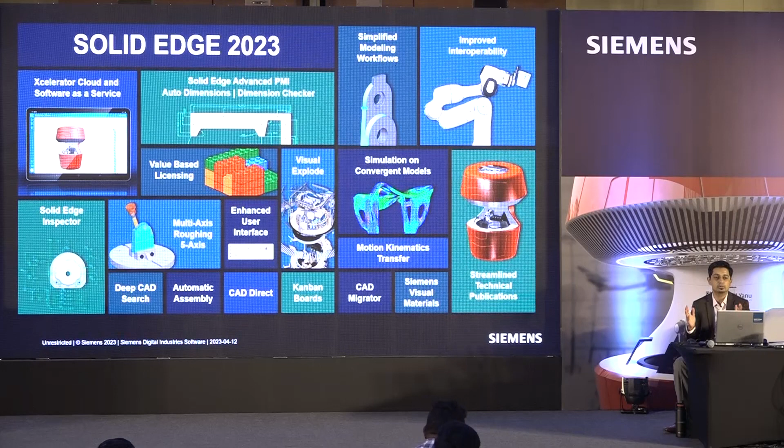This slide actually talks about a condensed form of everything that I'm going to talk about in the next 40-45 minutes. This is bringing you much more productivity gains.

So how many of you are actually using the software? Actual users of Solid Edge? Can we have a raise of hands? Wow, thanks. Anybody on 2023 already?

Oh, thank you. PD team, you can catch them for the inputs, huh?

I'm really excited to talk about some new functionalities like Solid Edge Inspector, and I'll be asking you if you have a quality department, if you do first article inspection reports.

Then we have introduced within Core CAD a lot of things like PMIs, MBDs - I'm sure everybody would have heard these jargons - visual explodes. With simulation, we have introduced how you simulate a model that's already gone through generative design, and it's actually a mesh model. So how do you mesh a meshed model? That's something which is very unique with our Siemens products. You won't find that with a lot of other competitive products.

In the next half an hour or so, I'll be taking you through all of this. Any questions anybody has, feel free to stop me, raise your hands, and myself along with my colleague Nitin here will be able to handle those questions.

Diving straight into mechanical design enhancements, which are to do with Solid Edge Core CAD, where with all these enhancements, the design engineer basically does a lot less clicking and a lot more work done fast.

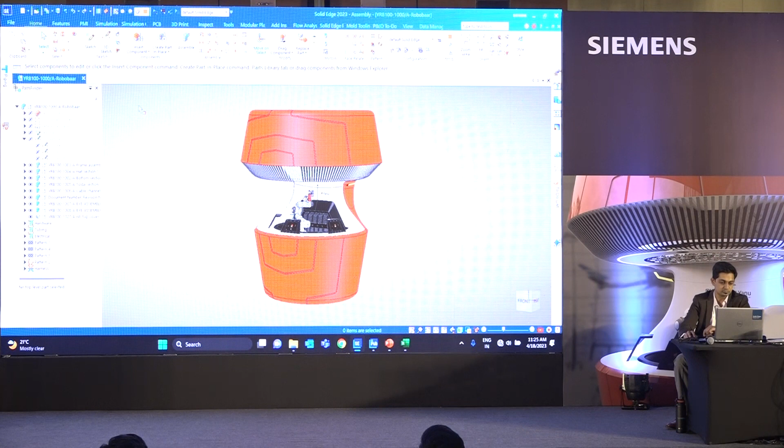On the top, you can see that the command bars as well as the ribbons are completely refreshed, and the color scheme is also now pretty much professional and upbeat.

The UI, we have got a lot of inputs on the UI. Those who have used our earlier software, some people are excited to use this, some still pretty much use the older UI and want to use those - very interesting comments that have been observed. But this is basically in line with the other CAD software that Siemens has to offer.

The UI is completely revamped with the symbols and the animation that it shows you while I hover over the commands. You can see that those certain animations would help a new user to adopt the software much more faster.

On the left hand side, now we have a pathfinder that is dockable and can also be set to transparent, so that if the CAD model actually goes a little bit behind it, you can still view the CAD model, and that sort of setting has been given.

We have also introduced the new search bar, and if you have large big assemblies and you want to search something quickly, you can just type in the search bar, and you can launch the part or sub-assembly from there.

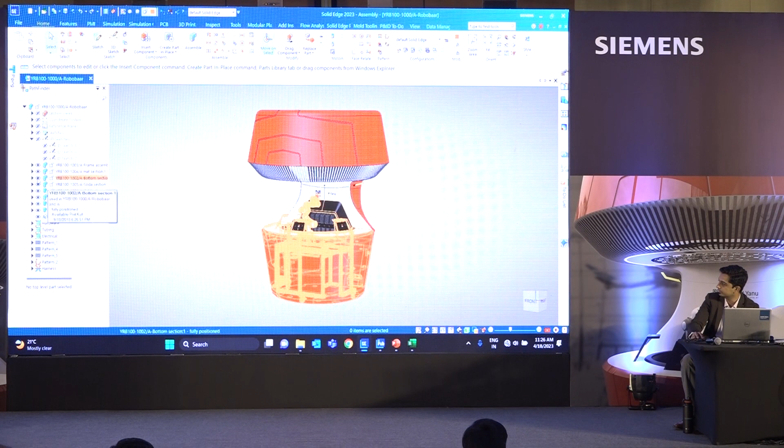If you want to go ahead and hide or show things, you don't need to right click or do anything of that sort. We have given an eye-shaped icon where you can simply hide stuff. For example, the bottom cover is hidden, and with one click it comes back again. So that's something new.

Apart from this, something interesting I'm going to show you: whether you're in an assembly, part, or sheet metal environment, there's an in-context toolbar that pops up. This toolbar is an accumulation of frequently used, object-oriented commands, and it decreases your mouse travel to the command bar on the top.

So what do you have here? You have things like edit definition, edit in place, open, hide, show. All of these things are basically right at your fingertips.

Just to give you a brief overview since you haven't seen this model in CAD, I'm going to zoom on the top, and there are a lot of taps on top from where the beverages are going to be filled up within the cup.

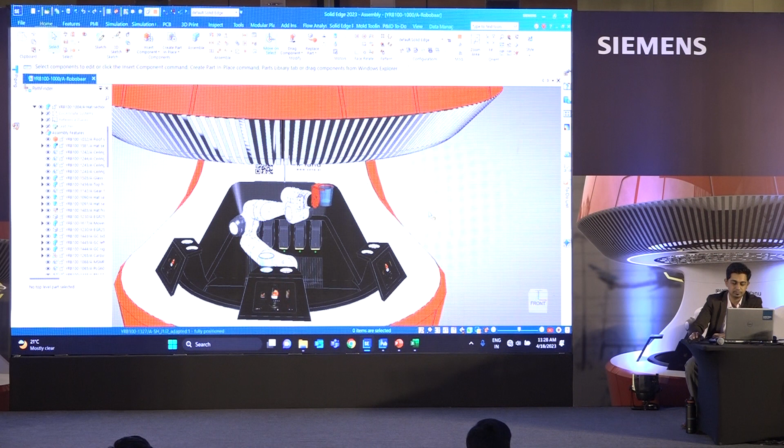This robot is actually 7-axis and autonomous, programmed such that when an order is placed on the screens you see here, the robot understands which drink to fill. It takes the cup, puts it to the tap, fills the drink, and then serves it.

Everything is properly managed by the robot. The payments are also understood and identified, and this is completely contactless. So when I say 2019, what comes to mind is that contactless is much more important, and they have achieved that.

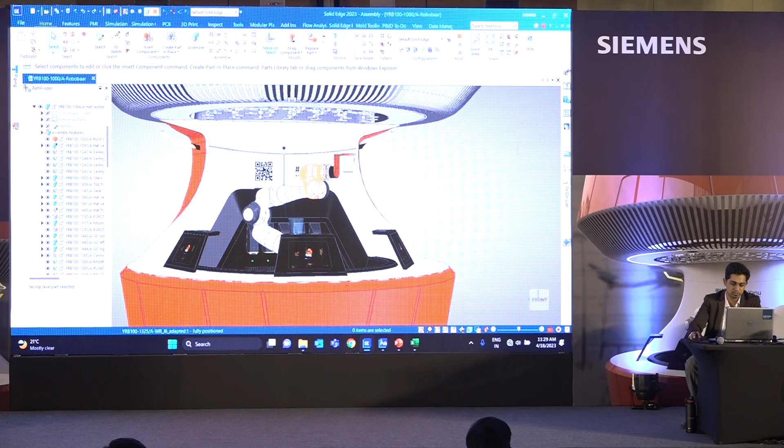Okay, let me show you what's new this time around. I'm going to use the assembly of the robot. I have two ways of doing this: simply hovering over it, I can quick pick to find where my robot assembly is, or I can type the same into the search bar. Since I forgot the name, I'm going to use quick pick.

The in-context toolbar has just popped up. Wherever I left it last time, it comes up automatically there, and I'm going to open this assembly. Once open, there are certain configurations I've already made, and the request from the team is for this part to be made.

I'm sorry, the part would already be here, I should have deleted it before coming in. Apologies for that.

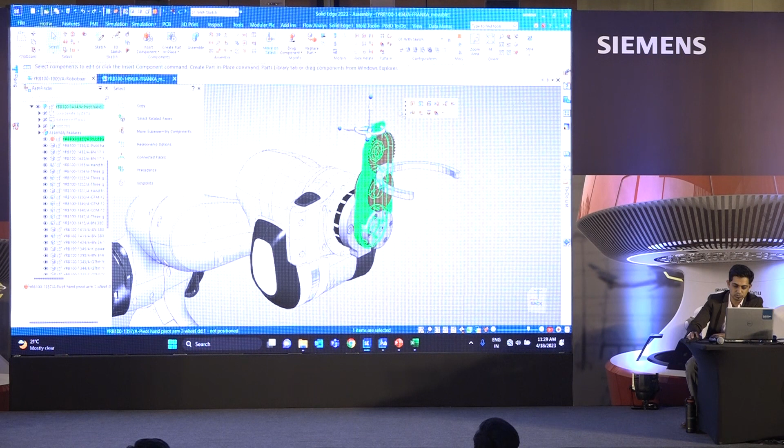So I'm going to take this and open it. I would have to delete a whole lot of things in order to show you what has to be done, and I'm just going through all of that.

There are a couple of cutouts I don't want to miss out on. It's basically just a sketch that I start off with, and I'll show you the sketch. So apologies again for that.

Okay, now that I have a sketch, let's see what's new within the latest edition of Solid Edge. The extrude command that was earlier available is now being unified for extrude cut as well as boss extrude. Let's see how we can do that.

The first thing is I'm going to pick up the silhouette edges and tell the software what I want to extrude. You'll also observe that all the command bars are now vertical instead of horizontal as before, and I personally find it pretty easy to work with once I get the hang of it.

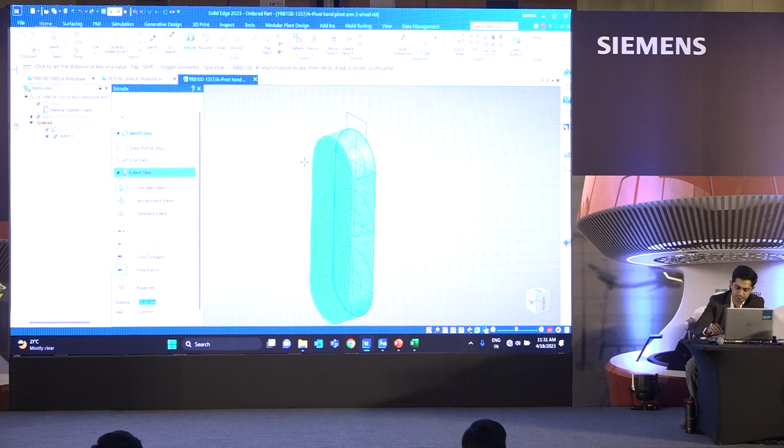A simple click on the sketch asks me whether I want to extrude it or cut through. This time I'm going to put in a value of 6mm and extrude it in this direction, then say finish. On the next direction, these are some basic steps, but next is something new.

I right click on the sketch and select activate regions. Now within the sketches, all the closed regions can be identified just by hovering over them. You activate the regions, and once I go over the 2D sketches, I can start selecting them just by pressing space bar.

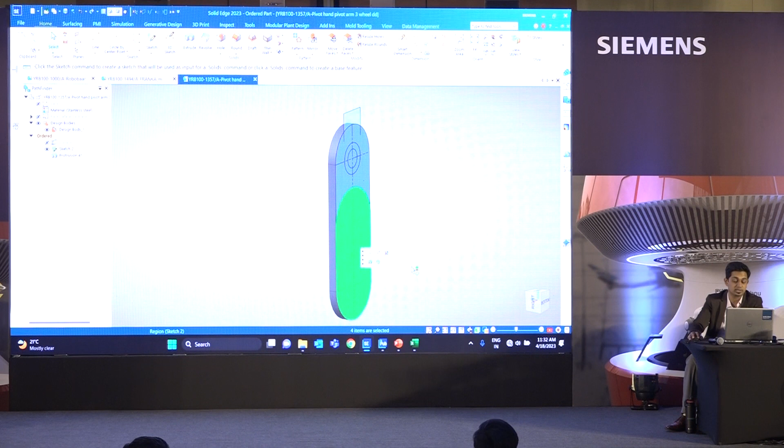Various different regions can be selected at the same time, and at the same time you can see that the quick context toolbar appears according to what I have selected. So I can go ahead and select extrude from here, or I could have gone to the command bar on the top.

Again, I am going to extrude in this direction with a 7.5 mil and say OK. So my part is taking shape.

The next thing I want to do is basically identify the regions for the holes, and this is where the gears are going to sit. When I go to the command bar, you have an extrude add cut over here.

It's set to automatic by default. If you have used add or cut in the previous command, it remembers that and you can revisit that automatically. So let's say I accept this, and you can see that now it is creating a feature.

I'm going to go ahead and say symmetric extend. Let's say I finish this by mistake. Instead of creating holes, a simple way of going back is to click on this again. You have an option of edit definition. Go back, instead of add just say cut, and it gets sorted there itself.

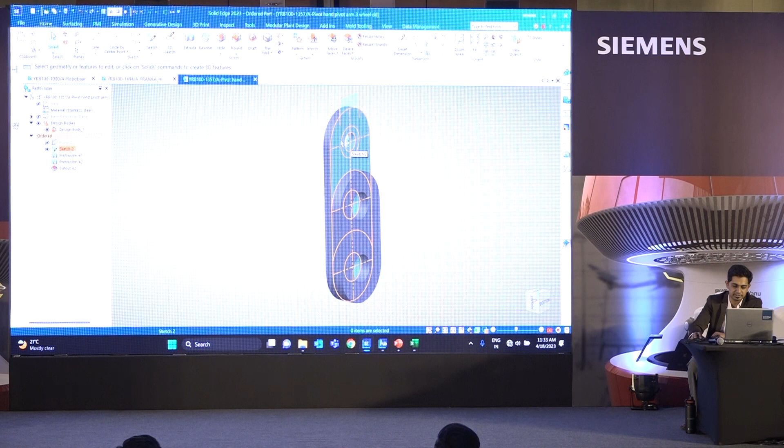In order to finish this part, there are some other things I need to take care of. If I right click on the sketch here, within the quick picks we have also made sure that the sketch is going to be shown first, then the region, then the protrusion, the cutout, and so on and so forth. We start off with the sketch as always. That's one of the things that has been enhanced.

I want this region, and I can select this region, and with the in-context toolbar select extrude. This time around I'm going to make sure that this is going to cut, not on both sides but on one side to 3mm.

Say finish. I also want to make a recess on the bottom, so if I simply hover over it, you can see that it has identified the closed region. I select the closed region, right click, and I'm just going to remove the material.

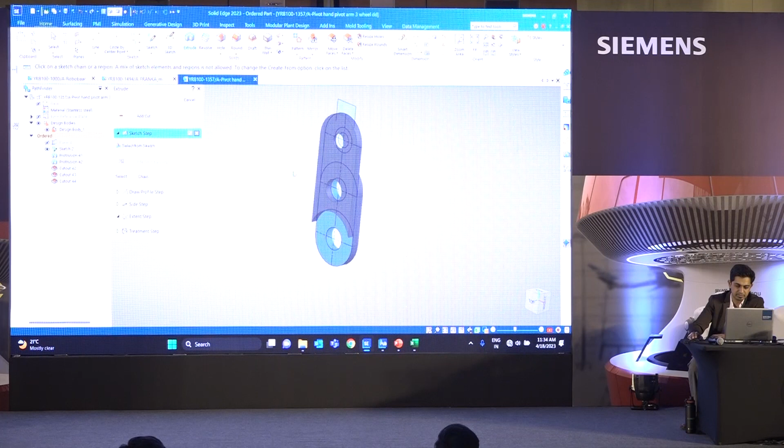Say finish. The next thing that is remaining is the tab on the top, and I select the tab. Remember this, I had set it to a cut, so it remembers it, and this time around I want to add the material. I select and say 3mm to this direction.

Part almost ready, coming in shape. All I need to do is give it certain rounds. This is from earlier years, some of the customer enhancements we have shown, which is right click of the mouse wheel.

Keep the right click, move around, and you have this radial wheel that pops up. You can customize the commands over here. So I'm just going to give it 2mm rounds to finish off this.

Say OK, preview, finish. Okay, now that this is done, the next set of enhancements which are included within Core CAD is basically, I'll right click and I don't need to activate regions anymore.

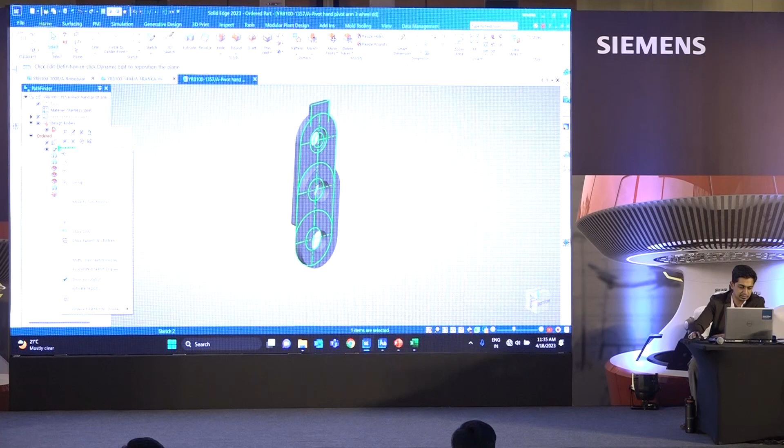I can also go ahead and hide the sketch, which is basically just here or here. It can be accessed from both directions. We have now included certain synchronous commands within the ordered environment, and you would be very happy to see that.

So in the Home tab, you would see move faces, and when I hover over it, you can also see a small animation of what that is. So certain synchronous commands like move faces, rotate faces, and offset faces are now included within the ordered environment.

So how is this going to help you? Let's see an example. I select move face, and I have a requirement coming from my manager saying, hey, you have done the design, but can you change this at the last minute? So no need to move from order to synchronous. We have move faces directly over here.

Select the face, right click. You can see that the synchronous steering wheel appears right over there, and you can also see the design intent, which is shown on the right hand side.

I need to move this by a few mm towards the right, but the design intent is showing me that coplanar relationships are active right now, and that's not actually required for me to move the upper face. So I can press P on the keyboard, and that will take that off, and I can move this by 1.5 mm.

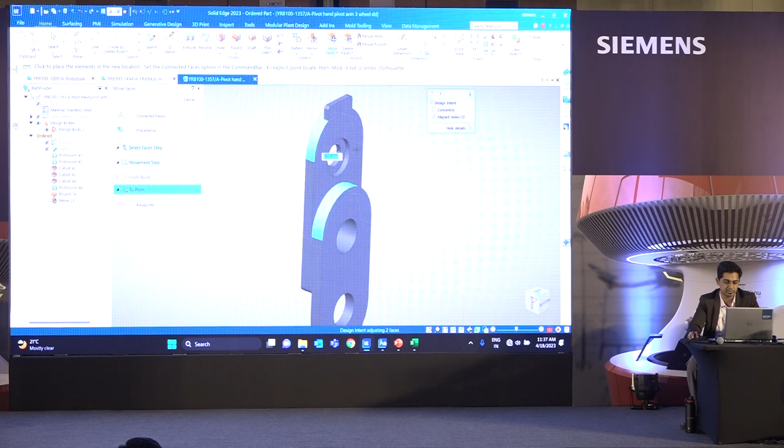Another example: I'm asked to increase the height of these circular portions of this part. I get the synchronous wheel, and I can either move this up and down, with complete control over this. You can also get rid of the concentricity of the hole so the holes don't move. Right now my requirement is that the hole should also move, so I'm going to move this by 2 mm to the top.

The next command I want to show you, similar to what's available here, is rotate faces. To make some last minute design changes, I've been asked to make the bottom of this part a little bit bigger. So I can use rotate faces and right click. You can see the steering wheel has appeared. I can reposition it to appear onto the edge, and then use it to increase or decrease. You can see that this is easy to do.

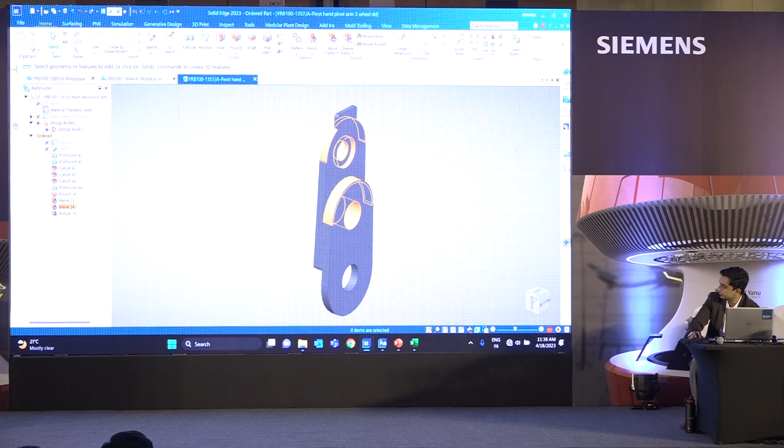The highlight of this is that any synchronous changes you make within the order environment are completely captured into the pathfinder on the left hand side, and you can revisit them anytime and make certain changes.

So how do we mount this part? The only way to mount this part is to have certain holes. Let's go to the hole command, and within options, we have introduced something new over here.

So this is a general hole, and the drill size, you can see the fit class is exact. If I change this to general screw tolerance, you can see we have 3 different options now that pop up: close, normal, and loose.

These are all available with counter bore as well as threaded countersink also. I wanted to show you the threaded option because that's what I want. I would change this to M3.

As I want certain holes of specific sizes, I can also keep certain settings saved, and if I save this, it would appear as my saved settings. I have saved certain settings for it to work.

Once this is established, you would also have options to change the standard thread. Once I select this, you have other options like the tolerances that would appear here. So if you want general tolerances, upper limits, lower limits, both would be available by the click of a button, and probably some other settings would also be available.

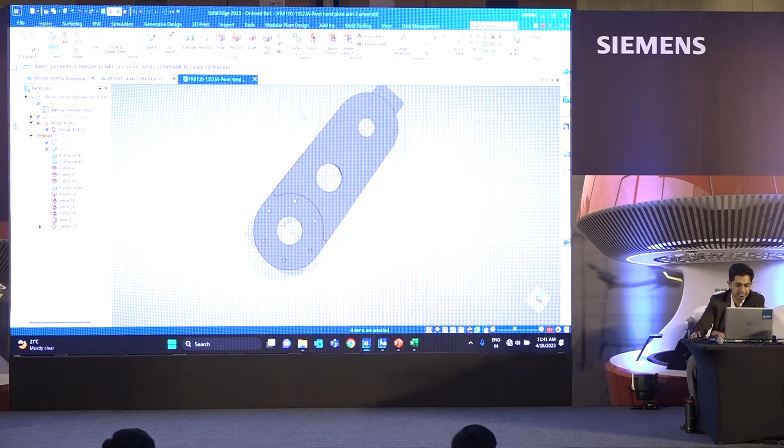Let's go back and see how the part fits within the assembly, and this is how the part actually goes and fits within the assembly. This is what the holes were for, at the bottom.

Now another enhancement is with respect to the style palette. It was already there, but we've added a lot more styles, more than 1,000 styles. I'd like to show you a few - we've got composites, fabrics, some glasses, leathers, lights, liquids, metals - and all you need to do to apply any of these is basically drag and drop them.

So I have aluminium that I want to drag and drop on this, anything that I want. Dragged and dropped, it applies the material as well as the appearance. That's one of the neat enhancements that was discussed.

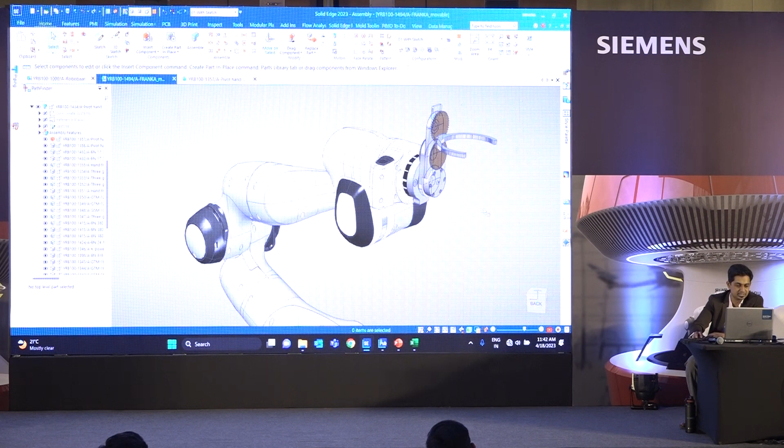Let's go back now that the part has been made to the main assembly. Once we are in the main assembly, I'm going to show you certain enhancements within the assembly.

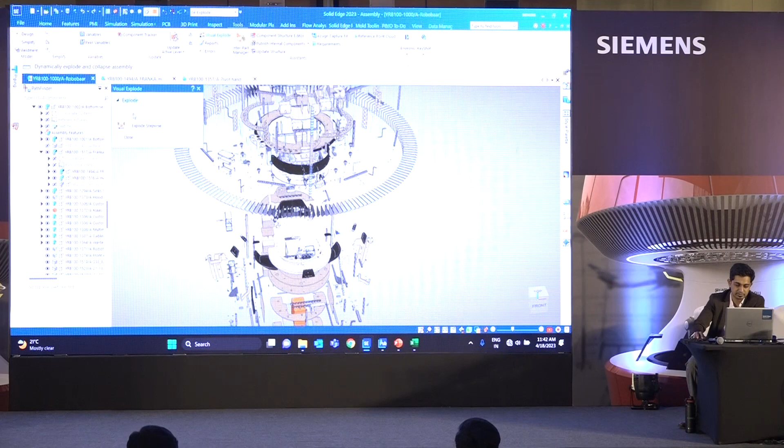Another neat enhancement you would observe is under tools, we have introduced visual explode. This is quite interesting when you have a large assembly and want to see the visual explode done. There are two options embedded within one command, and the first one is just a slider that moves from left to right, showing the effect. You can see I'm just moving the slider and this starts exploding. It doesn't matter how big or small the assembly is, you can see all the minute details before giving all of this for production manufacturing.

And then the interesting part is you have stepwise explode, which is something interesting. You click on this button and then you move the cursor from right to left. Notice the difference.

Any inputs from your side on what the difference is? It takes into consideration some of the sub-assemblies first, looking at those levels first, and then you see this difference. So up till now, are you finding this interesting? Something that you had asked for before?

Yeah, thank you. So these were basically some core CAD enhancements, and I would like to revisit my presentation. I'm going to summarize what all you just saw. You have an updated and refreshed user interface. Now you can define regions in 2D ordered sketches, and you can also use the synchronous steering wheel, which makes things much easier. You have a unified add and remove command within the ordered features.

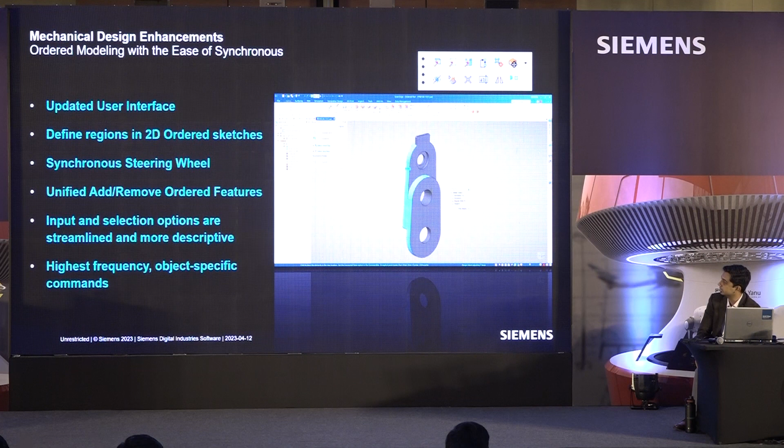You have a lot of input and selection options that would basically streamline the entire process of going through a design, and highest frequency object-specific commands are now available within a click within all the different environments that we offer.

You also saw visual explode with two steps, and the style palette in which we have included 1000 plus high quality styles. It just requires simple drag and drop, and you can also have a folder with frequently used styles that keeps things very much under control.

This brings me to the next part, which is interoperability, and this year we have really pushed the boundaries, where we have brought in collaboration with your existing Solid Edge motion kinematics data that goes into NX MCD as well as process simulate. Has anybody of you heard what NX MCD or process simulate is?

Raise of hands. Somebody at the back, so you heard about it? Have you had a chance to use it? Excellent, excellent, thanks. I would like to hear something from you right after, probably during the break, about how you are using it, so that it can reach the wider audience.

The tagline here is go further with your design data. I'm going to make use of this existing robot, which is 7-axis. We have already done motion on this within Solid Edge. Take all of this kinematic data, try to find if we can do the process simulate, and process this for the dynamic data within process simulate.

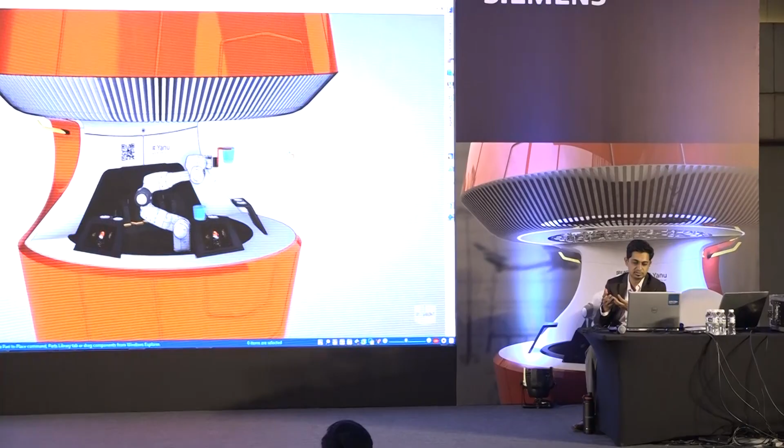For this, I'm going to run a small video, no live presentation here. Again we are focusing on the robot which does all the work basically here. It picks up the drink, fills up the glass, puts it back again. That requires a lot of dynamics and motion movements.

So the first thing that you see is we are going to open up the robot assembly, and all the joints are going to be captured. All the parts are captured automatically unless you want some parts to be excluded. This is the motion environment of Solid Edge. Different types of joints, basically just revolute joints over here, which are going to help the robot move in different directions. The very base part is of course grounded, so that is not going to move.

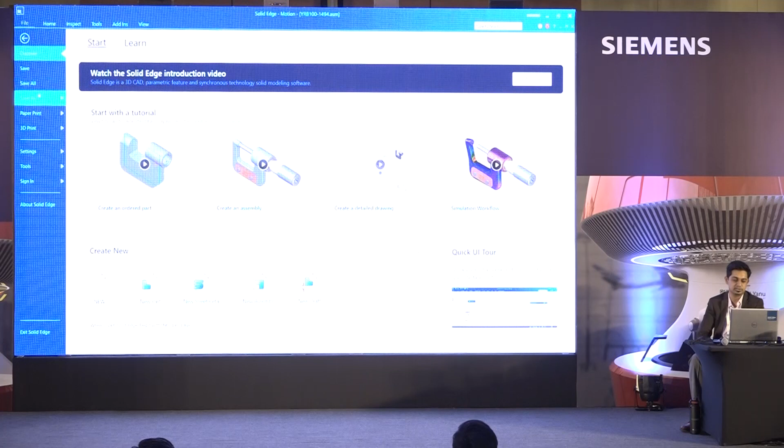We are going to save all of this as an extension of the file. The CAD file is going to be saved as JT, and all of that joint information and motion information is saved as PLM XML. All of that is then put into process simulate, and we have a command called joint jog, which actually sees if the information that was captured within Solid Edge is processed within here.

And then you have this kinematics editor to see if all the links on how these relations within Solid Edge were given are captured perfectly or not. Once that is done, after the kinematic editor, you can give the motion and simulate.

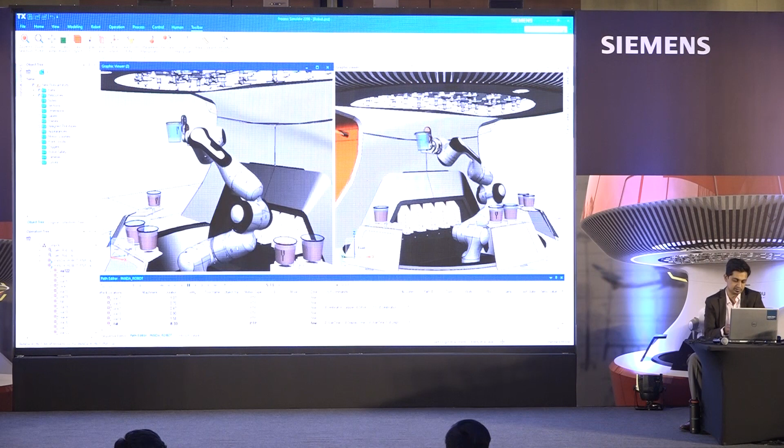There's a particular line I had written down just so I'm speaking the correct things. The movement is defined from the tool center point frame, TCPF, using inverse kinematic movements, which are then calculated automatically. So a little bit of technical stuff going on, and that's how you bring all of that data.

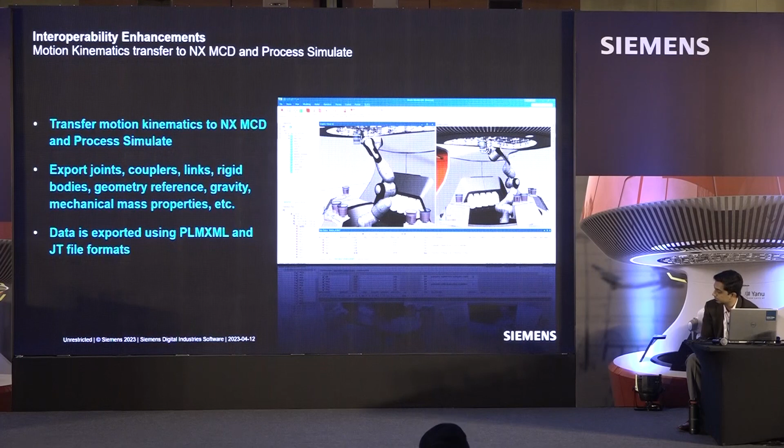I think I've already spoken about this during the video. Just to summarize, you can export joints, couplers, links, rigid bodies, geometry references, even gravity and mechanical mass properties from Solid Edge into NX and process simulate. The data is exported using PLM XML as well as lightweight formats, which is JT, Jupiter Tessellation file formats.

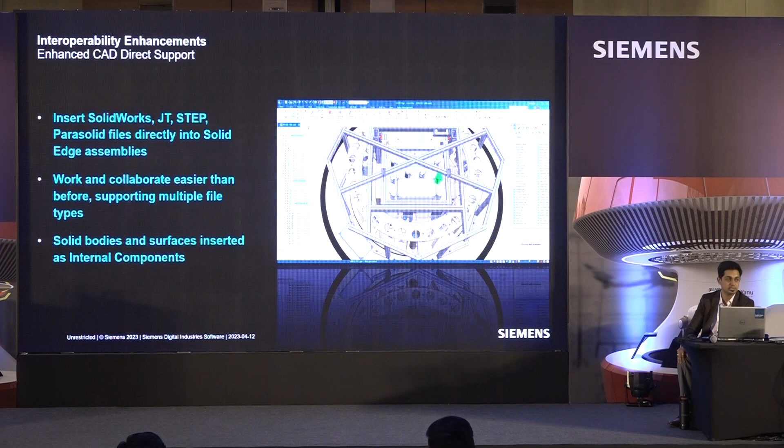This is something that has been enhanced within the CAD Direct support, and those who attended our session last year would know what CAD Direct is. If you're working with a lot of vendors and third-party CAD system data, you'd get files from SolidWorks, neutral file formats like JT, STEP, Parasolid, for parts as well as assemblies. Now we're able to open all of that within the CAD Direct functionality within Solid Edge assemblies. We support NX parts also, which makes collaborating with colleagues, internal or vendors, much easier.

Now the beauty of this is solid bodies and surfaces are inserted as internal components within the assembly, so you don't need to save all of that in a folder location outside. Wherever the assembly is, all of this information is contained within the assembly itself. If there's any revision on the original data, you just need to make sure the file name is the same and is replaced with the previous file. As long as the references are there, they'll get updated automatically. That's the beauty of CAD Direct.

This brings me to the next enhancement, which was highly requested by most users who are into paperless manufacturing. This is model-based definition, standing for MBD, and I'm also going to be talking a lot about PMIs.

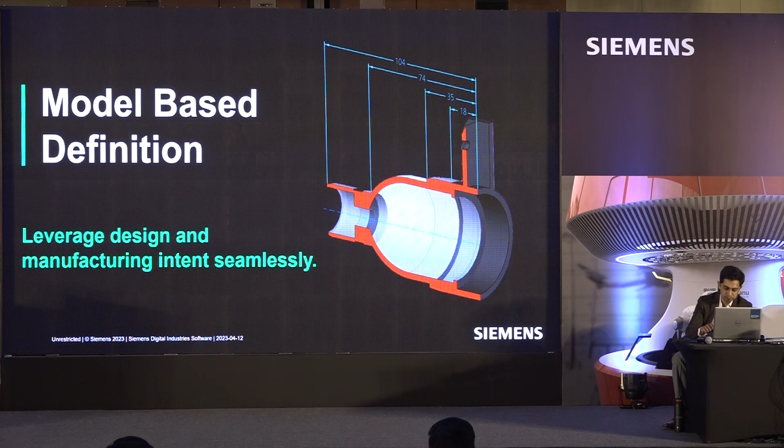So does anybody know what PMI stands for? Can I have a show of hands? Any information that can be put onto the 3D model itself, which will help the manufacturer to manufacture it without taking a printout. PMI stands for product manufacturing information. PMI and MBD are always spoken of in the same breath, so that's why the tagline here is leverage design and manufacturing intent seamlessly.

Before I come over here, I'm going to show this live. So give me a second to close this down. I'm not going to save this time.

For the PMIs, I actually require a couple of other assemblies also to be open, so I've pinned them down in my recent folders here, which makes it much easier for me to open up. This is one of the assemblies I'm going to talk about. The second one is this, and there's one more assembly I'm going to talk about.

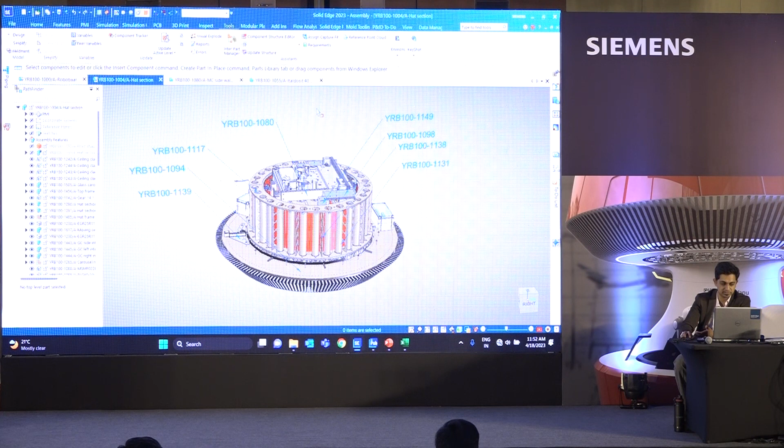Going back to my main assembly, I'm just going to put it to all parts. Within this assembly is hidden a maze of structures, sheet metal components, and I want my manufacturer to know exactly how the dimensions are going to be placed. The internal assembly over here is this one, and you can see certain callouts and PMIs are already listed. There's a small part I'm going to open up, which is a sheet metal part, and that requires a little bit of attention from the design engineer because some other things are not defined, and I've opened it over here.

You can see the dimensions are a little bit haphazard, and mostly working on any other 2D CAD systems, you would have to move all of these manually. So what's new with Solid Edge 2023 is within the PMIs, we have something called arranged dimensions, and this will actually take all the PMIs and select them automatically.

We can give a stack pitch of 1 here, and ask the software to create an alignment set. That means all the dimensions I select, either manually or automatically, will get aligned automatically, creating a set of alignment. So if I move one dimension, all the rest would move according to that.

I'm just going to press one single button to deselect everything, and to the naked eye this might look a little off. I'm just going to select all the dimensions towards the right. All the dimensions that are selected turn green.

I simply want to not select 2 dimensions, and I've selected a stack pitch of 1, and I just say arrange. This will do a fantastic job, and I can do this multiple times by changing the stack pitch also. My work is done. I'll deselect them. This also depends on how zoomed in or zoomed out I am, so you'll find a lot of changes depending on that.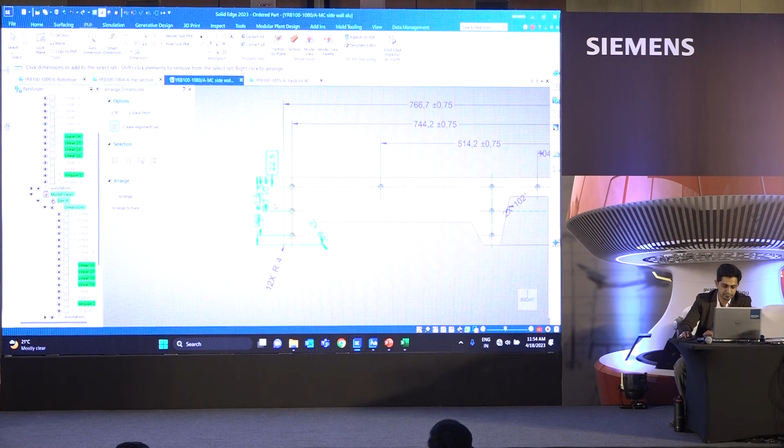So I have an option of selecting an area. I simply click and select it to this area, and if I zoom in I can also go into the background and arrange the fonts. For the naked eye, if I zoom out, this is just going into each other right now, but you've understood what I wanted to convey. Okay, so this was one of the good enhancements.

Second thing you would have observed is I need to still give dimensions for a couple of holes over here, right? Those are not defined. So can I do this manually? Of course, but then the enhancement here is about auto dimension, where once you set the options for auto dimension properties, which pop up automatically, like what do you want to dimension automatically?

Planar faces, cylinders, holes, what sort of dimensions do you require here? And you can set the template for this, right? So I'm doing a demonstration here, and I can give it a name, and all of these would then pertain to the set template.

I was a few minutes back talking about the dimensions where you can choose between unit tolerance, limit tolerance, basic, reference, and here I have given plus minus 0.5. For simple hole diameter, I have chosen unit tolerance. This template hasn't been applied yet, so once I apply this and say OK, the template will then be applied there, and these would change.

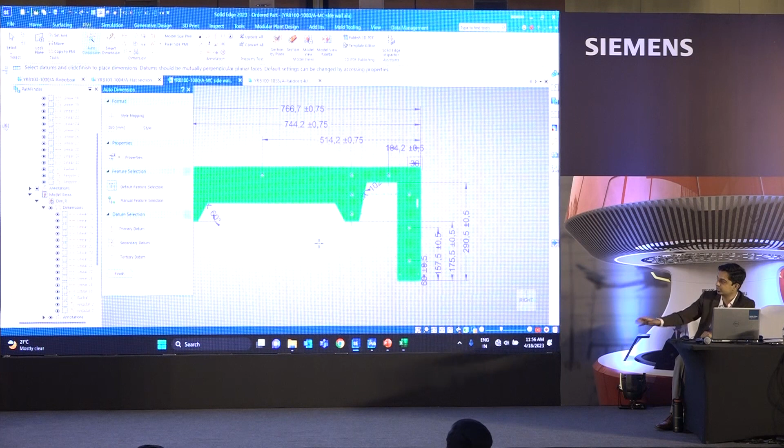So what I need to do in order to give the dimensions automatically is find out if the datum selection has been done or not. I'm going to select 3 orthogonal datums, the first being the primary datum. Once selected, it turns green. The secondary datum is going to be this face, and the tertiary datum is going to be the bottom face. And then I have 2 options for feature selection.

Should I ask the software to do this automatically? Here I just want to select 2 holes, so I'm going to go to manual selection and select the 2 holes, one here, the second at the bottom, and say accept. Then I'll say finish. Once I do this, you can see that all the required information has been given.

All I need to do is just reposition this in place. I'm just going to pull this out real quick and move it to the side, and there is a dimension that has appeared on the right hand side. I can put it back here.

Okay, so this was about auto dimension.

The next thing I wanted to show was an enhancement related to the model view palette. How do you capture all these views and bring them onto the drawing sheet? Here you have a model view palette, opening on the right hand side. It's basically the models we've created, the different views we're going to capture and bring into a manufacturing drawing, or publish into a PDF.

So I have 2 views created. Some keen eyes would have observed that the recent changes I made to this view have not been captured. There's a reason for that, and I'll go back and show you where all of this has been captured.

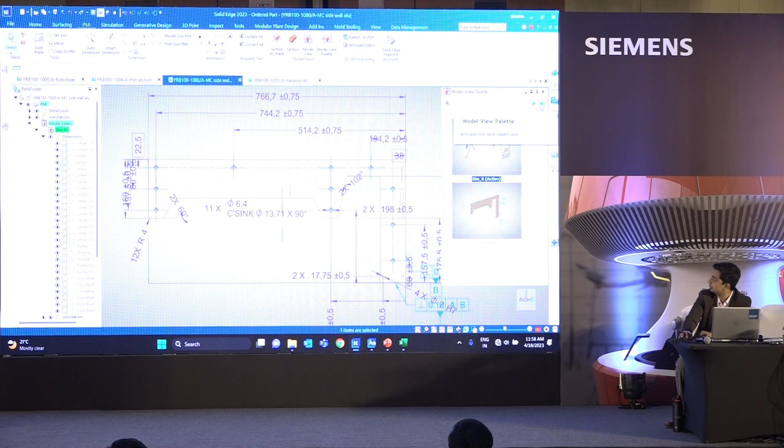And I'll say finish. Once that's done, I just need to use the arrows left and right, or I can double click here and go back to see that my model view has captured all those changes I made. That's pretty easy for the design engineer to do.

The next thing I'm going to do is create a view. I'll hide all the PMIs, move this to, let's say, a front view, and hide this. So I need to set the view first in order to capture it.

There's a button at the top on the model view palette which creates a view, and I can give it any name I want—it's the front view for me. I say finish, and I'll go ahead and give it certain dimensions just for relevance.

This is 6 mm in thickness, and just some random dimension for the length. I can also give it a feature control frame—I've already set this up to save time, and I can save this as a template, like the one I saved before. I say OK, select this, and set the flatness to 0.05.

The next thing available in 2023 is rich text that appears as notes. I've already saved that as a template, and you can link those notes to property texts—for example, the revision number. So let me find where the revision number is and say OK, and it shows a preview of that.

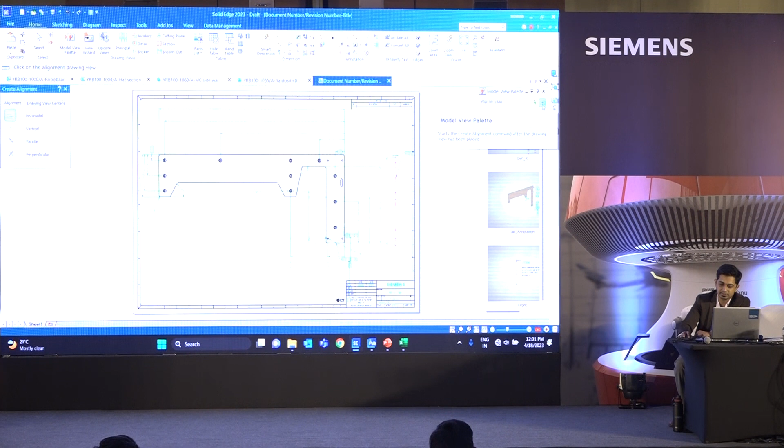You can see that on the right hand side. If I want to drag and move a view over here, all I need to do is simply drag and move it, and there are several different options available. The first one on the right is where you want to align it with some other view. Once I place any view, it asks what other view I want to align it to—I simply click this, and it gets into position.

So this is one of the new enhancements we've come up with, having a lot of requests for it.

So are you with me up till now? Are you finding this a little bit interesting? Any questions?

Any questions for the PD team? Do you want to see something new? Apart from this, just throw it out.

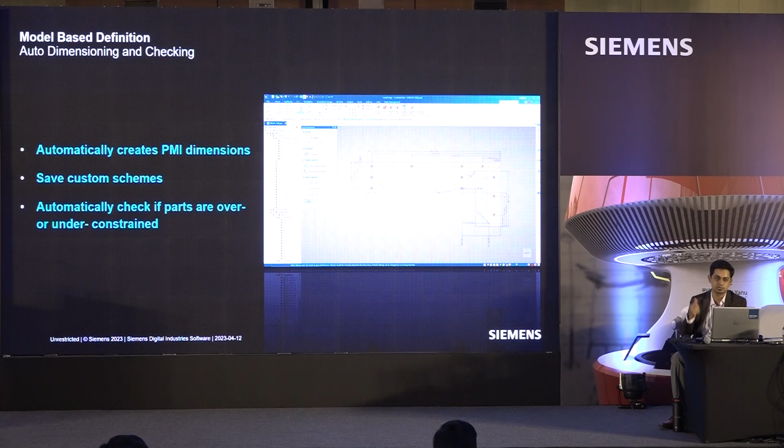Okay, I'll move on, going back to the presentation. So again, summarizing, we have a command that automatically creates the PMIs now. You can save all of this within custom schemes and bring them up again if required, and it also automatically checks if parts are over constrained or under constrained, showing different colors like green depending on the constraint status.

We have also enhanced the model view palette within the 3D environment as well as the 2D documentation, and now we can create drawings with a few clicks by just dragging and moving onto the sheet. This is one part I missed, so let me go into the 3D and show you this additional MBD support we've done.

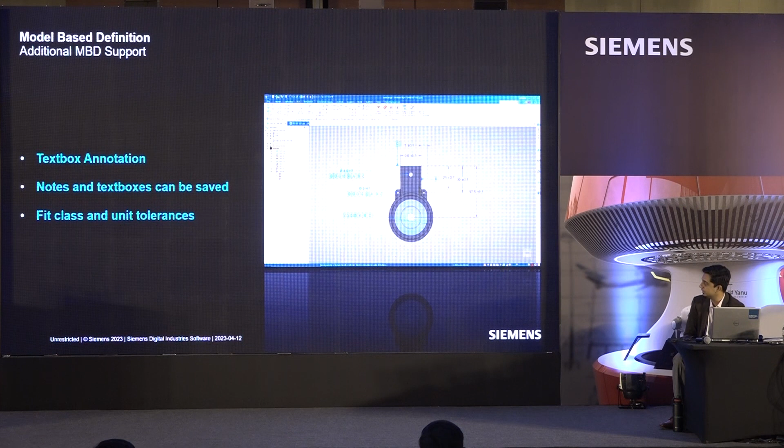While giving the callouts, the annotations as well as the tolerances are already there, and there is cross reference between them. Notes and text boxes can of course be saved and reused again and again. And fit class and unit tolerances, the ones given while specifying holes and dimensions, are appearing on the PMIs now. Let me go back and revisit this.

This is already open on my side. You can see that the view palette is there. I was talking about this, where once we give a dimension, it appears onto the PMIs automatically.

Moving on to the next view, you can see that section views can now be given a single solid color, so if you are taking multiple part section views, they can have different colors, which is much more pleasing to the eye.

Now a new enhancement: if we go to the traditional center line command, you have something called the center axis, right? This was a long awaited one and I'm pretty happy about it. All you need to do is select this, and the center line appears, and once it appears, I can drag it and move it around to make it bigger. Once this becomes bigger, I can go ahead and give it certain dimensions—sorry, I chose the wrong command.

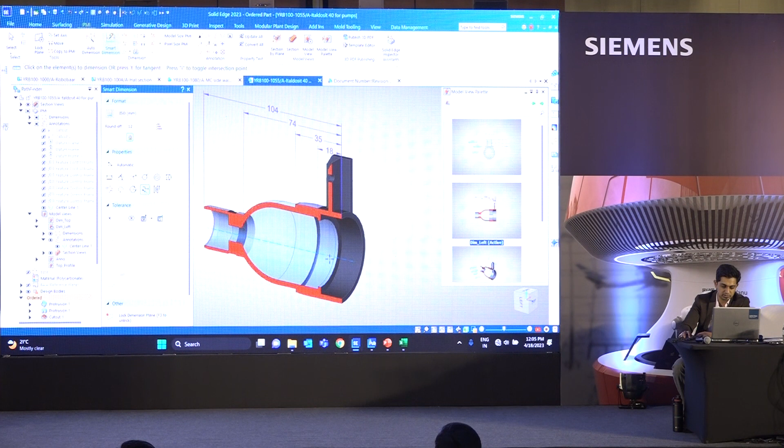It has to be smart dimension instead of auto dimension. Through the center line, let me just reorient it to the top view. This is one dimension I want to give. The second dimension is using the center line again, the axis. I'll give another dimension, right?

So it becomes much easier when you have section cut views, and this is applicable for bores, shafts, cylinders—anything you can apply a center line to. So this becomes easy.

Next thing is, once a callout or dimension has been applied to a feature, you now have a cross reference. You select the dimension and it gets highlighted on the part itself, even in a cut section—you can see the different part features highlighted there. That's another enhancement that has been done.

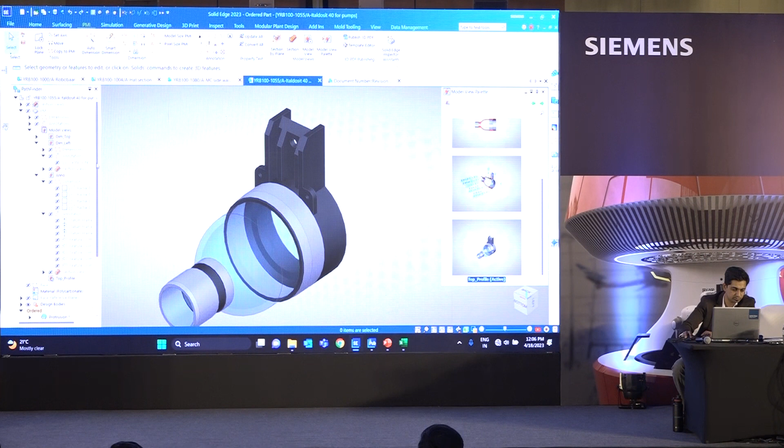Moving on ahead, you can see that some dimensions would be given while—let me just put on the PMIs, not everything, sorry, let me see what view this is. Top profile active. So in model views, I need to put on the dimensions, right?

The basic enhancement here is I can go to copy to PMI, and any dimensions given while making this part can be selected, and they will get converted from sketch dimensions into PMI dimensions. That's something requested for a very long time, and we have delivered that.

Sorry, I'm not able to show you that—somehow I'm not able to locate the PMIs on this. Let me try this one last time. Copy to PMI, I'm going to select this.

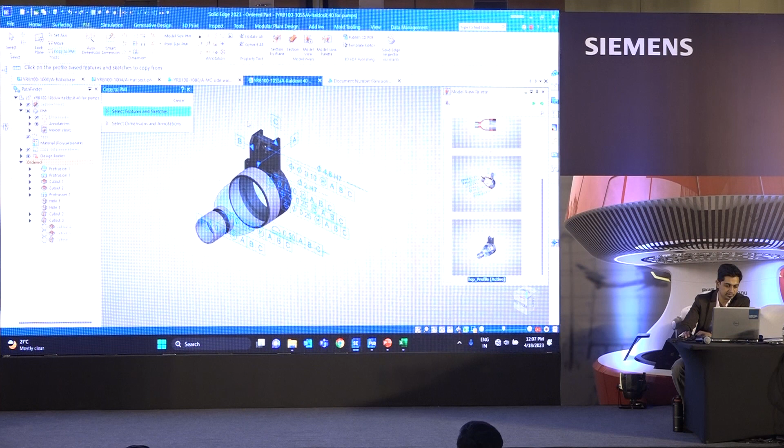These are the dimensions here, and I'm going to select the top dimensions and say OK. So it takes into consideration all the dimensions I have selected, and turns them into PMI dimensions. Once this is done, the beauty of this is you can select the dimensions, and they also have a cross reference with whatever they're attached to annotate. So you see this face here—the 3 mm—it will show you what the dimensions are on the screen. So this was about MBD.

I'll quickly move on.

Okay, now a question about - how many of you actually make first article inspection reports? Can I see a raise of hands? Do you have a quality inspection department? Can you tell us more about it? Is it a batch process? How is it done? Can we have the mic in the crowd, please? Somebody.

Manually, okay. Right, okay, thank you for the input.

So we have come up with Solid Edge Inspector basically to address that issue where most of the first article inspection reports are made manually, and there are a lot of manual errors involved. It also takes a lot of time, so this would actually reduce a lot of designer time, quality inspector time from hours to minutes. It automatically identifies, labels and extracts critical design characteristics from a 2D drawing as well as MBD or 3D PMIs.

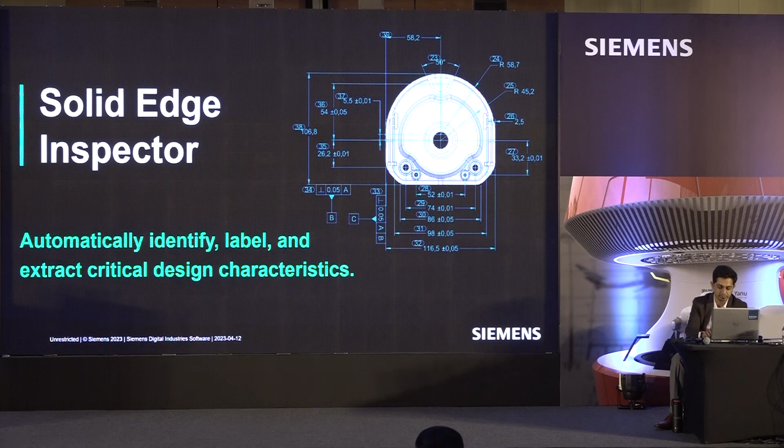Okay, so let me go ahead and show you all of this live. I'm just going to close all of the documents before moving on, and I'm not going to save anything as usual.

Back to my dimensions, and I would require one more part to be open for this. So coming back to the part that we worked on with MBD, I'm going to process the same part with the Inspector. Another way of opening up the drawing is going into data management, opening the draft - it automatically identifies where the draft has been saved and launches it automatically. This was what I just created a couple of seconds ago. I don't need the model view palette.

So where do you find this Solid Edge Inspector? You go to Assistant and go for Solid Edge Inspector. Once this Solid Edge Inspector is launched, it appears on the right hand side. It's a completely dockable pane, so you can move it around, and if I want to pin it, I can pin it.

So what do I actually want to capture from this drawing is the bill of characteristics, right? Whatever has been given like GD&T, dimensions, notes - all of this would get captured within a few clicks.

In order to do that, the first thing I need to set is a template, a template for the tolerances. You have this option at the very bottom for general tolerances, which opens up the tolerance table, and you have various options according to ISO 2768. These can be customized according to how you want them, and I'm going to set them to medium. You have linear tolerances, angular, bore, chamfer tolerances - all these can be set beforehand.

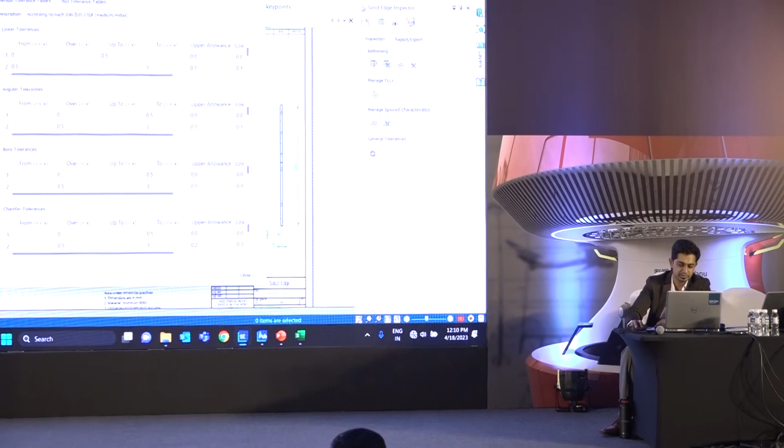I'm going to save this and close. This is what I'm going to apply. The next thing I'm going to go with is ballooning. This command here is going to create the CNs automatically, and all I have to do is just click that. Once I click that, it creates balloons very neatly and cleanly throughout the drawing. I'm just going to zoom in on some of them to showcase what all it has captured.

Of course, there would be so many questions popping up in your mind right now. Can we change the balloon numbering? Can we change the color scheme? Can we mark critical balloons? All of that is definitely possible, some of which I'm also going to be showing you.

Now, once this is created, there should be a document which actually accumulates all of this information and puts that into a single document for the quality inspector to go through, right? So yes, definitely that's possible.

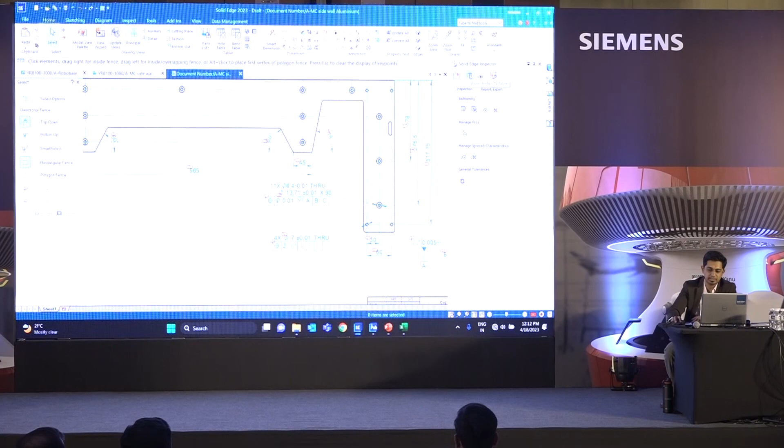Before going there, I would also like to show you different things related to the ballooning. You can actually go ahead and hide and show things - so if your drawing has too many dimensions and the balloonings are too close together, you can hide and show this together. Here you have an option to hide and show the table in which everything has been captured.

So this is a table which can be customized with applying a lot of filters. I'll put this at the bottom - I have a little bit of a crunch with space, so I'll move this around just to show you the dimensions and the ones that have been captured here. So you see the GD&T has been captured, the class has been captured, nominal values, upper and lower limits.

The ones in yellow basically indicate that the dimensions do not have any tolerances applied. It's referring to the template that we had set up in the background, and it takes information from that template and puts it over here.

Simple stuff. You can also see a couple of dimensions that can be highlighted by selecting. So I selected the 14 number dimension, and it cross highlighted this one. Similarly, the 15 number one is over here, and of course it shows the same balloonings, 24, 24 and 23, 23 over here.

The example I want to show you here is by pressing Control and selecting both of them, then right clicking, we can change them from minor to critical, which is the priority we've set for that. We can also go ahead and apply filters and actually commit. Once you commit this, it changes from minor to critical.

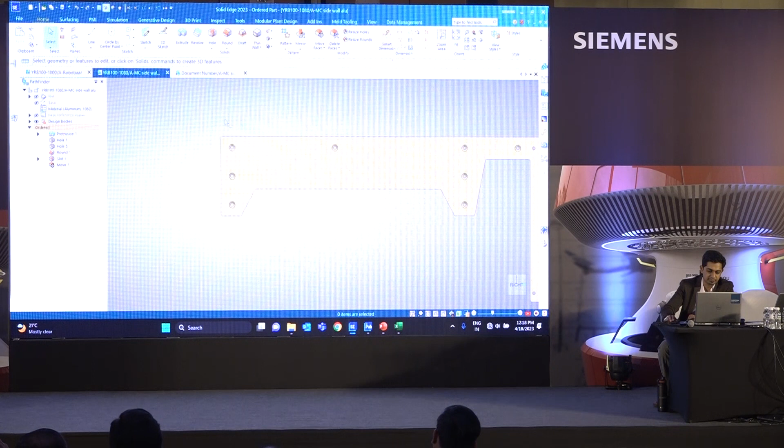The same is available with a 3D PMI model also. It would balloon all of the 3D PMIs automatically, and we have the same table that is available. So I won't go back again and show you that.

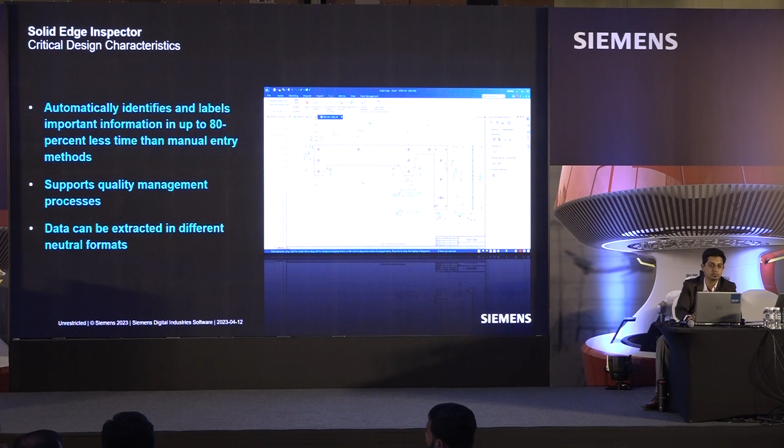It automatically identifies and labels important information, saving up to 80% of time for the quality inspector. Data can be extracted in various neutral file formats like XML, CSV, etc. First article inspection reports are automatically generated within an Excel file format, with very easy location of errors, so that even manual errors are completely avoided.

Okay, this brings me to the simulation features and enhancements. Anybody from the audience already using our simulation software? Can I have a show of hands? Any simulation, or simulation within the CAD also? Anybody who has used static simulation or any other simulation? Good, good sir, thank you.

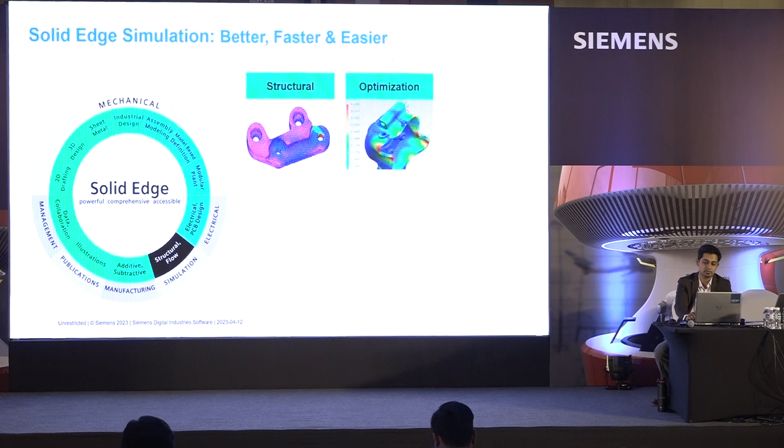We also deal with structural simulation. We have optimization of parts based on structural integrity, as well as reducing stresses or mass of the part, which is integrated within our CAD itself - something unique. We have kinematic motion available. Generative design is something upcoming and very much in talk. Then you have thermal CFD flow, and we also offer one dimensional flow for closed circuit pipings.

This is a neat example of machinery and the different things you can apply simulation on. One is you have a bracket and you can apply it for stress. The other is you can analyze the natural frequency, like something of a pump and motor. Then you can analyze the motion of the conveyor system at the end.

This was something we introduced a couple of years back, which is hydrostatic pressure in a storage tank - pressure due to the fluid and gravity being stored inside. You can analyze the buckling for the structure, slender long members, and you can also analyze structure for factor of safety using von Mises stresses.

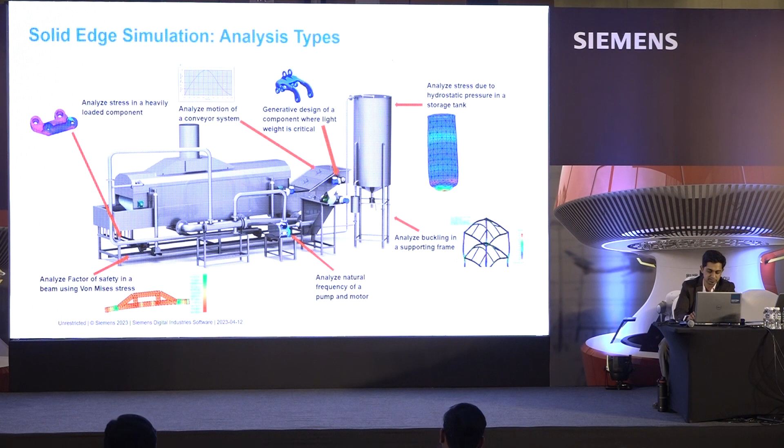This is something that we offer you. So the CAD module itself has so many things, like time-based motion, linear static, optimization. I don't know if you are using all of this to 100%.

With standard simulation, we have this as an add-on module, and now this is available with value-based licensing also - I'll be coming to that. We are working with normal modes and buckling, and we have coupled solvers like heat transfer, steady state, transient heat transfer, and harmonic response.

If you want to go much more ahead with nonlinear simulation, all of this data can be passed on to our Simcenter portfolio, which can be added on at any time.

Okay, coming back to what is new within Solid Edge 2023 simulation, I would also go through the live setup of generative design. In a nutshell, generative design is available as an add-on within Solid Edge. Keeping the structural integrity, we reduce the mass material of the part, and some people would also want to run a simulation on that to find out if it's safe after being optimized. So we are going to see how - we call it convergent mesh modeling. Let's go ahead and see that live.

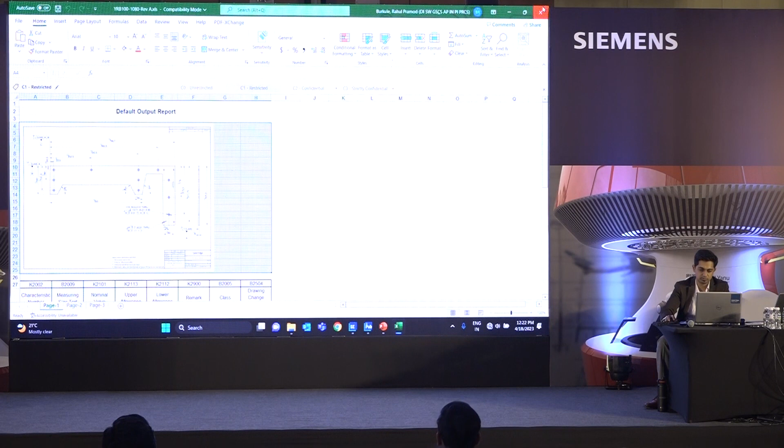Okay, I'll close down some documents that are no longer needed. For the simulation part, I would revisit my main assembly, go to explode, and this time around we have taken an example of something that is everyday use - a caster wheel assembly. I'm going to quick pick this and select this assembly, open it up within its own environment, and show you this bracket. Right click on this and edit in place. Once I'm editing in place, you can see the reference. I'm going to do a normal Control Q and go with generative design.

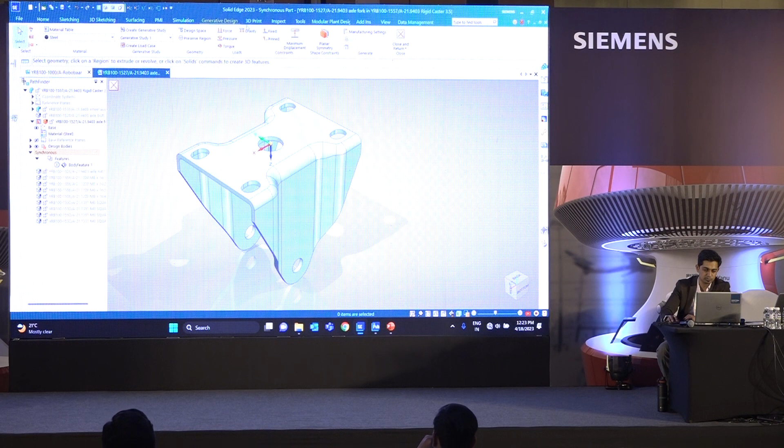My aim is to see if this bracket made with sheet metal is able to sustain the load of the entire assembly or not. So I'm going to create a generative design study. By default, the material is steel. I'm going to apply a force of 1000 Newton in the opposite direction, and I want to say the offset of this shouldn't be more than 2.5 mm, and I say okay.

The tab for generative design can appear on the right hand side. It's dockable, you can dock it anywhere you want, and it gives you a nice pathfinder kind of display of how many things are being done.

The next thing is where this is going to be held together in place. This is going to be fixed right at the bottom on these two places, and it asks me whether this should have an offset or not. So this is going to be 4 mm for me, I am saying that this shouldn't move more than 4 mm.

The next enhancement I want to show is with respect to maximum displacement. This tells the software that I don't want this face to move more than a certain amount in mm. So I'm going to put this as 0.05, and for the offset, again it's the same value it's asking me, I'll put it as just 2 mm.

The next thing it's asking me is to just place a point on that face to make sure that face is going to move up and down, restrictive up and down. So I've selected that point, and then I have an option where I can tell the software that it should either look at the absolute magnitude or XYZ direction. So if I want the software to move that face within a particular direction only, I'm able to do that. So that amount of flexible control we have.

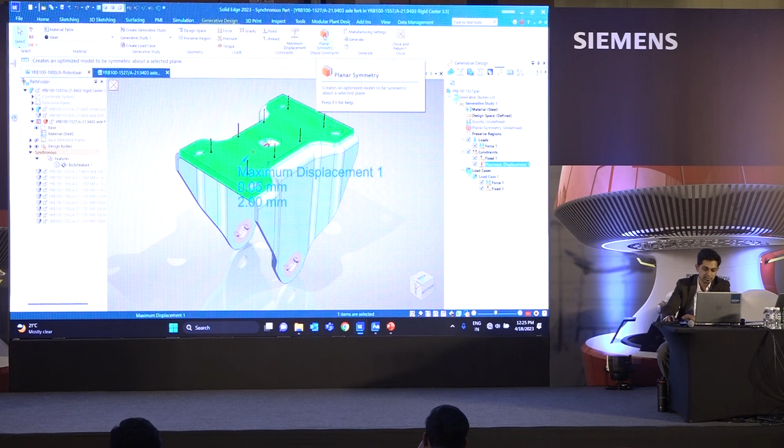So now this is set up. The other thing we are going to set up is an enhancement about planar symmetry. This is very good, and I want the material to be removed which is symmetric around half the part, or a quarter, or more than a quarter, like an eighth. So this time I'm going to select this plane around which I want the part to be symmetric about, and it will remove the material symmetric about this plane. I'm going to select OK, and all I need to do is say generate.

When I say generate, it asks me what sort of study quality I want. I'm going to put it low since I want less time for it to run, of course you can refine that. This part originally is around 300 grams, and I want to remove around 10% of the weight, keeping in mind the stiffness. So I have different options, and I set this to generate. It gives me a warning saying do I want the preserved regions, because the preserved regions are more than the target volume. I say okay, that's fine, I've preserved certain regions which are more than the target volume.

Now instead of just waiting for this to solve, it takes around a minute or so to solve, I would go back to the PPT and actually tell you what is going on. So you are basically trying to optimize the part around a plane, keeping in mind the boundary conditions and the loads that have been applied. This will actually convert the part into a mesh model, it's a faceted model, and there are certain commands that we would later on be using this.

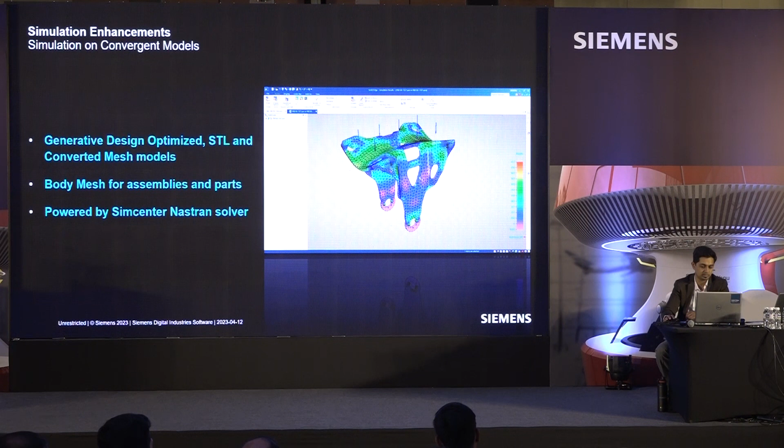This is what we saw right now: maximum displacement can be applied, planar symmetry. Before going on to the next one, I'll come back again, and it gives us a brief summary of the time that has elapsed, the status also, so it is still generating it. In the background, it is also generating a report of the things going on over here.

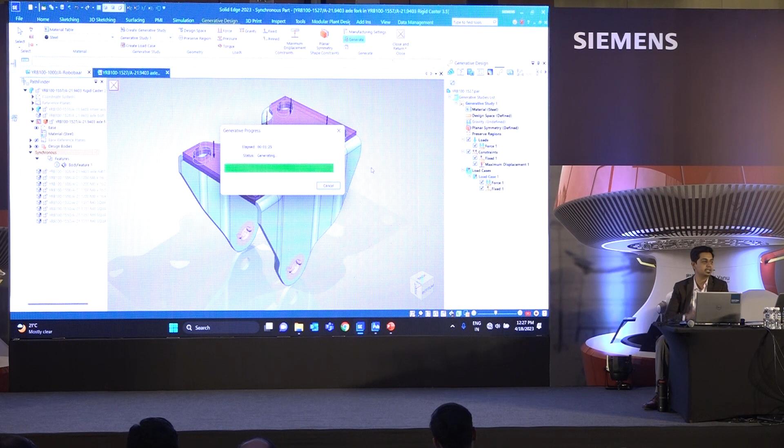So until now, does anybody have any questions? No? That's good.

Allow me to just run this for a couple more seconds. So what it is trying to do in the background is minimizing the weight of things by around 10%, which is 30 grams. Now it has finished.

So the time required is basically to make sure that it is symmetric around the center plane. So any idea how we are going to manufacture this? How are you going to manufacture this? Punching, okay, stamping. Any other idea? 3D printing.

I see some faces there. I haven't tried it myself, but I'm sure you can reach out to the PD team for that. I'm sure if this is possible here, it's possible with 3D printing. Any which way, the point here is this can be manufactured, right?

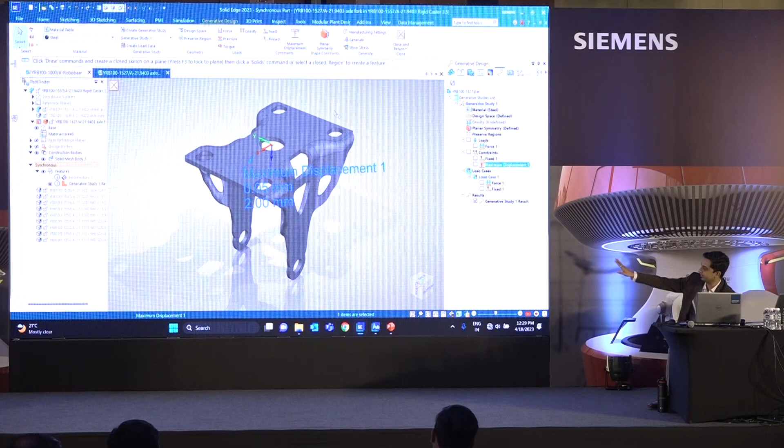This has created a faceted model through generative design, and I'll show you where the stresses are occurring. When I zoom in, you can see the stresses occurring at the very bottom, shown in megapascals, which is 22 megapascal. The yield for this steel is around 262 megapascal.

So it shows safe, but I want to run a static simulation on this. Can we run a static simulation on a faceted model? Let's see if we can do that. I'll go to view and show you the faceted edges - this is what the model looks like.

Right now I want to run a simulation. For that, all I have to do is right click this, detach from the study. On the right hand side you have a solid mesh body that I need to toggle from design, and then it gets included within the design bodies. This is the original design body, which is hidden, and this is the one I want to work with. So I right click on the design body and activate it, and then I no longer require my original body, so I'll right click this and delete it. Now this body is good to work on.

I'll quickly go to simulation and run a new study. It gives me certain options. The study type I'm going to run is linear static with tetrahedral mesh, and for geometry check, I'm going to set it as warning only.

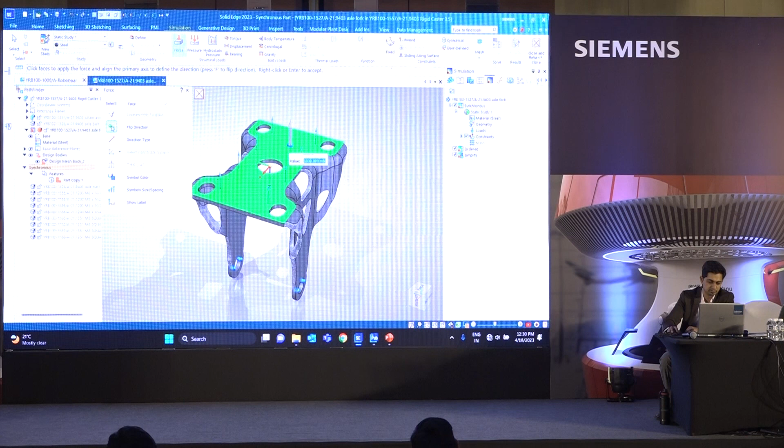Once I start this, I'm going to fix it right at the bottom. Then right click to give it loads, which is force on the top. Direction this way, 1000 newtons force, and all I have to do is mesh and run this study.

So when I go for meshing, this is actually going to take into consideration a meshed body and then remesh that body. It's quite unique, and it does a fantastic job of meshing. We've also come up with new features and enhancements with respect to meshing, which I'll be showcasing as well.

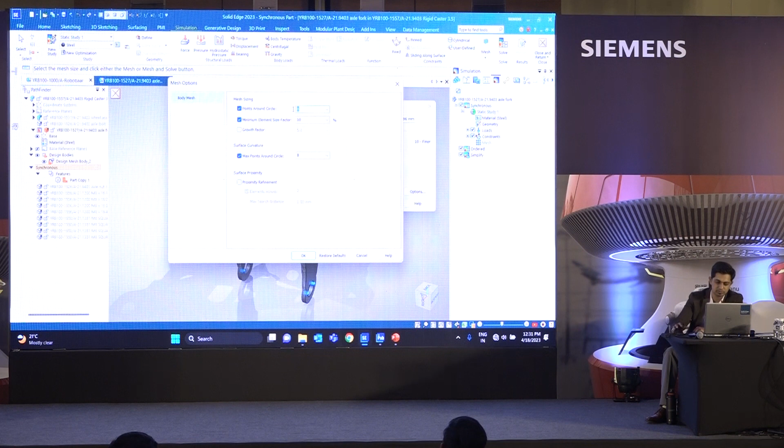It usually takes a few seconds to get into the command. With a tet mesh, I'm going to set it at coarse because I just want to show you how it happens. A body mesh option was earlier available for parts - it's now available with sheet metal assemblies as well as parts. If I show you the options, you can set points around the circle, Jacobian to around 6, so it saves some time, and then mesh and solve.

It shows me a mesh progress of what it's doing in the background - it will first load the geometry, then mesh it, and then generate the results for us. While this is happening, this will take around a minute or so, so I'm going to revisit the presentation.

Up till now we generated a mesh body, took that mesh body, put some forces on it, and now we're running this in the background. What we can do with that is run multiple what-if studies - we can duplicate the existing mesh, no need to keep on meshing it again. It remembers that mesh, duplicates it, and your further simulations happen much faster.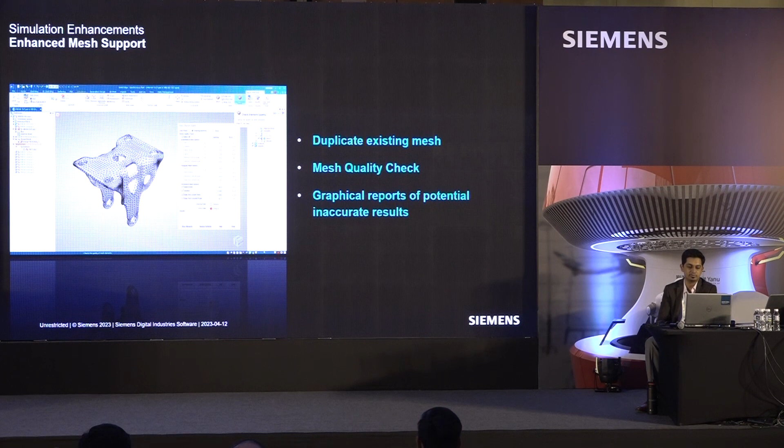We've also introduced a mesh quality check, which I'll show you in a few seconds, where there are 14 different Nastran solver mesh quality checks that it takes us through. It's very useful to find out where the errors are - graphical reports of potentially inaccurate results are basically the output of this, and it makes our work much easier.

Okay, coming back, this has been done. You can see that the stress hotspots are again observed in the same position. You can go ahead and animate this, showing how it happens after the loads are applied. I can also see the yield strength - the yield stress is at the very bottom, 262 megapascal. Of course, this has not surpassed this; it's at 62 megapascal, so we are safe.

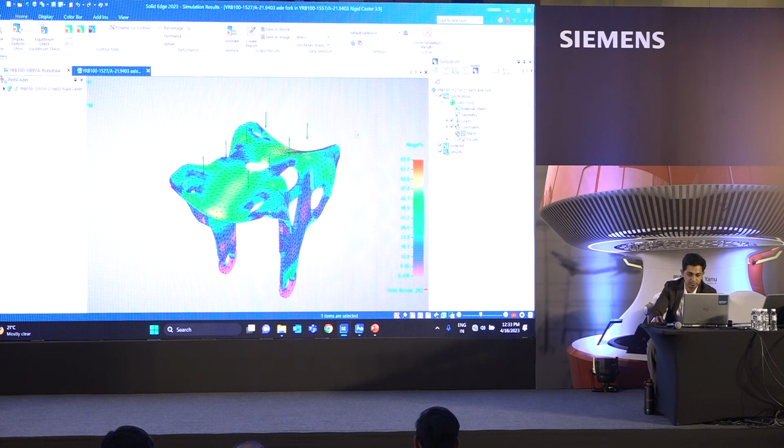I'll close the simulation results. There are a lot of other things to show. In mesh, I can go ahead and check the mesh quality.

When I check the element quality, this is something new which is introduced. You can either have an error displayed or a warning and error. There are 14 different quality checks for aspect ratio, Jacobian, edge points, skewness ratio, for quadrilateral mesh, triangular mesh, as well as tetrahedral mesh. So let's put this to an industry acceptable limit of aspect ratio of 15.

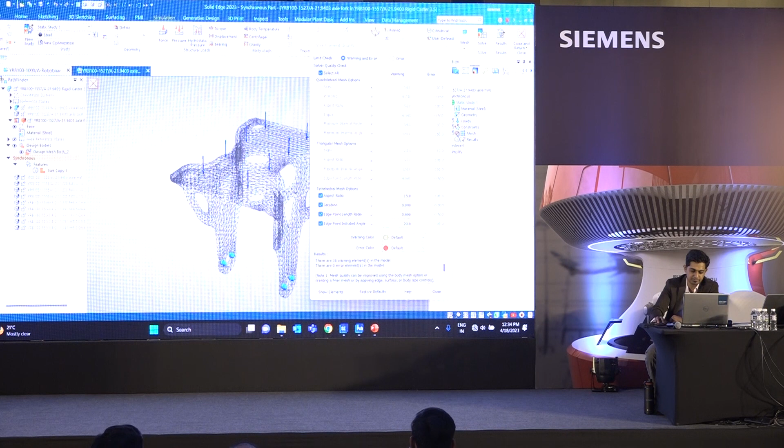And see Show Elements. When I run Show Elements, it actually launches this .txt file and shows me the results. Right now I don't have any issues with the file, so it doesn't show me anything. It's good to go. If you're wondering why I'm not able to see any warning color or error color, probably the skewness or aspect ratio has gone bad at the very end of things, but right now my focus point is not that. So this can be a very good element quality check right away.

Now if I want to run multiple studies, that too is possible by changing the loads. All I have to do is right click static study, duplicate it, and it shows a pop-up asking if you want to copy the mesh, so you don't need to go into meshing the part again. So it copies the mesh, and I am into study number 2 already.

I can go ahead and change the loads. There are a couple of loads that have been applied. I'm just going to change it from 1000 newtons to 2500 newtons, and I'll simply say solve. You can see that it says load geometry - it will not go for meshing, it will automatically start running the results in the background. So this should take less time than the previous result - you can see it's already gone 80% or so, and now it's processing the results. So it's just one time that you mesh, and then the next time it's all duplicate mesh.

I'm going to go to the presentation in the meantime and move on ahead.

Next enhancement has to do with technical publication enhancements, and I just got a cue that I'm running short of time, so I'm going to do this a little bit faster. Now what we have done with technical publication is we have completely revamped it. It gives us a better look of Microsoft Office tools, and I have opened that in the background.

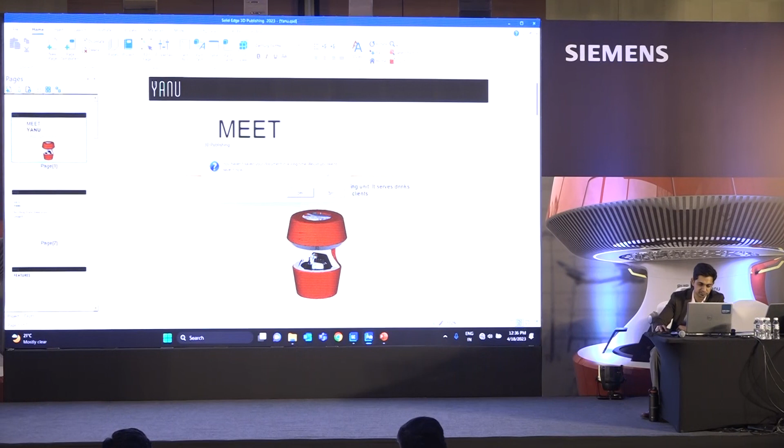This is technical publications, which I have opened. This you can see in the background is much similar to what Microsoft Word looks like. Everything is neatly laid out - pages of the documents that I'm going to publish for marketing purpose, animations that I can run with the tables. You see these animations that appear over here, right?

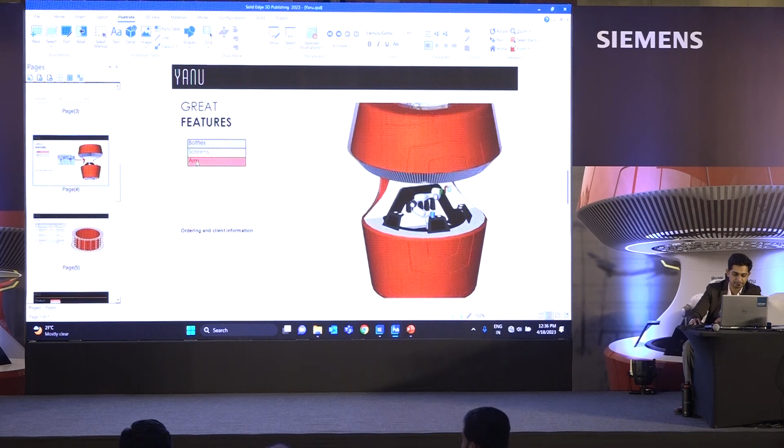So the first thing I would do is go to Illustrate and show the storyboard. For the second storyboard, the enhancement here is I can go to the transition timeline and go ahead and flash the parts. So this is the new flash part feature where I can have certain parts that are flashing. I can remove the overlap automatically, say OK, and just go ahead. You can see that when I go back over here, the parts that are supposed to appear are flashing now. You see that? So that is one of the enhancements.

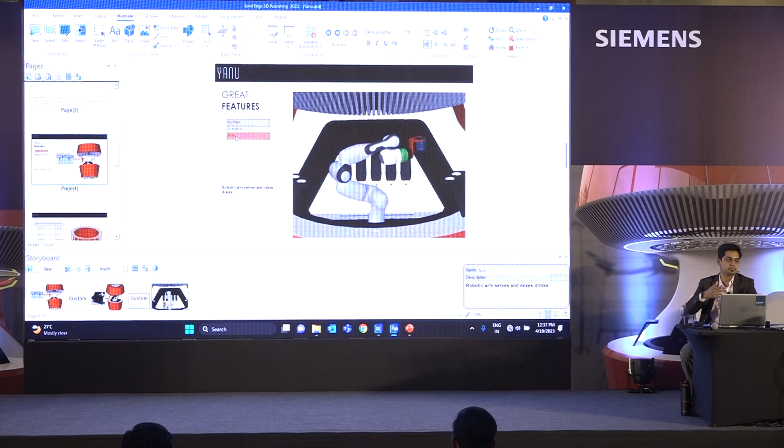The second one is similar to flashing. We can also have parts that are in the front or at the back be faded and brought in ahead, so the console was faded over here and I brought that ahead. Again, we have certain rich text that can be manipulated directly from here - just select the text and it can be manipulated on the fly. So this was one of the enhancements that has been done.

The next thing is now we also support simplified assembly, simplified parts, family of assemblies, family of parts within the parts table. I just need to close this. If I click on any of the parts table, the parts are highlighted. So that's basically one of the enhancements.

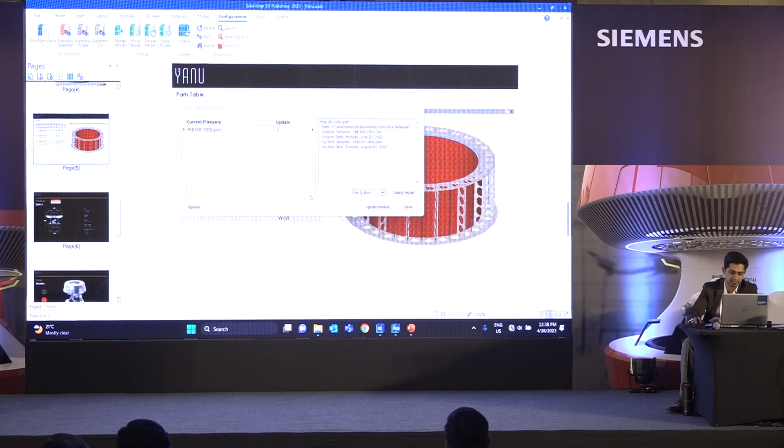I would go to configuration, update. This is one of them, and I have certain parts that I don't need to show any of these updates for, so I'll say OK. Select the model, basically show where the updated model is, and say update model. This will basically update the model on the fly, so if there are any simplified parts or any family of assemblies, that would get updated automatically. I'll say done, and these parts are now, you don't want to show a lot of details.

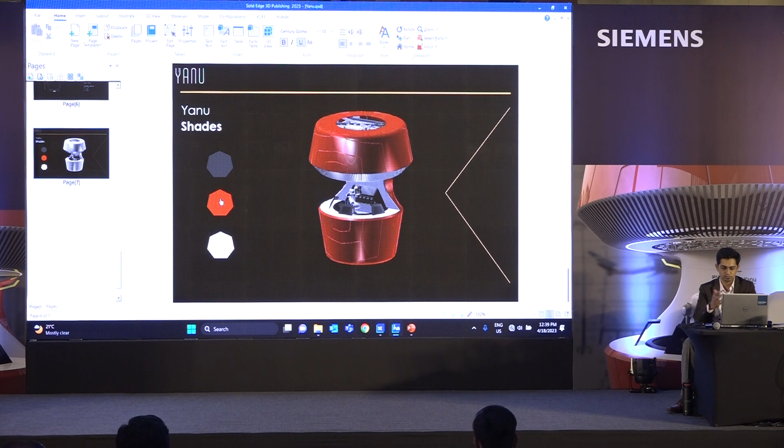Come out of edit page, yeah, and then you can change the colors also. Certain commands that can be set are changing the page automatically, running an animation, so on and so forth. So these are some of the few enhancements that are within this year's release.

And of course you can publish this as an HTML file, so that all of this opens up on the web browser, and all of this document can be shared with third-party people, right? So I'm going back to my presentation.

Next is quite interesting, and I want the volume to be up, please. This is value-based licensing.

A tokenized system that you can buy as an add-on, and this is a video that would be running: a flexible licensing option, addressing the challenges of a rapidly changing development environment.

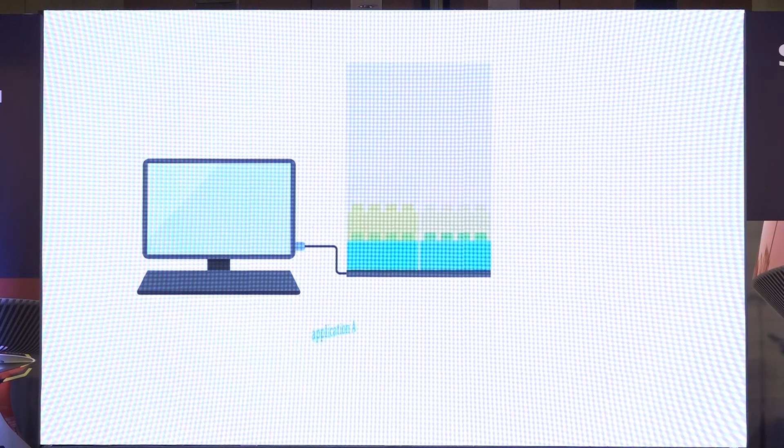This approach allows you to discover new Solid Edge add-on products while increasing flexibility for you and your team. Let's have a look at how value-based licensing works. Starting with the base application, Solid Edge Classic or Premium, value-based licenses offer a fully flexible environment in which users can explore different functionalities. Companies acquire a set of tokens which allow the running of a wide array of applications. Tokens are available in yearly subscription packs that make the add-on products available as a single shareable bundle. Tokens can be checked in and out to allow for maximum flexibility. Each add-on product consumes a defined number of tokens when in use. The total number of applications and which specific applications that can be checked out is limited by the number of tokens users have available.

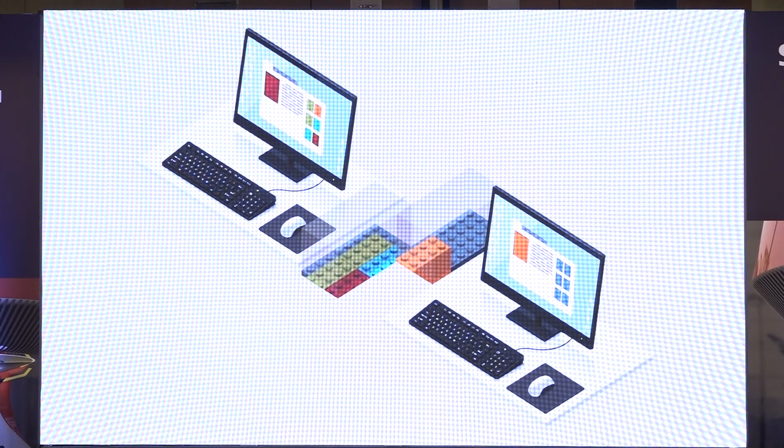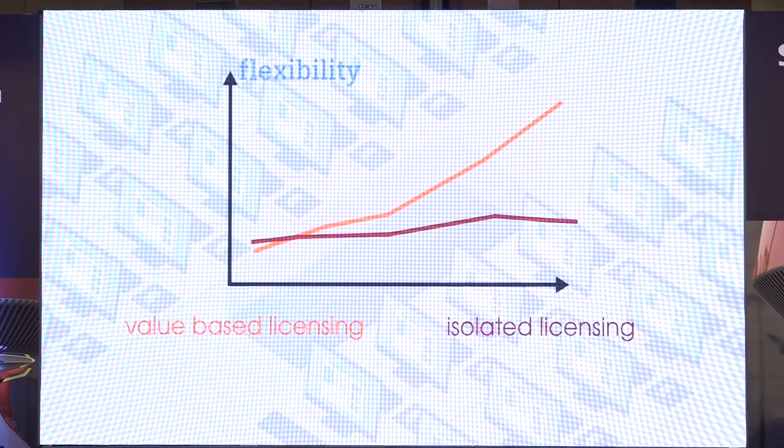Value-based licensing is even more flexible when combining multiple users, each with their own desktop and set of tokens. Just imagine a worker is confronted with the maximum token limit. By having a joint token pool, the limitation is automatically lifted as he or she is able to claim unused tokens from a colleague. In this context, it's also perfectly possible for users to use the same application simultaneously, as long as the token maximum isn't reached. Value-based licensing gives you the ability to manage cost, discover new applications, and easily scale your business. In many cases, the total investment is less than individual licenses, yet the flexibility dramatically increases, regardless of whether the modules are used daily or occasionally. Value-based licensing, new for Solid Edge, offers a truly flexible, cost-effective, simple-to-scale approach that reduces risk over time and encourages users to maximally explore new possibilities.

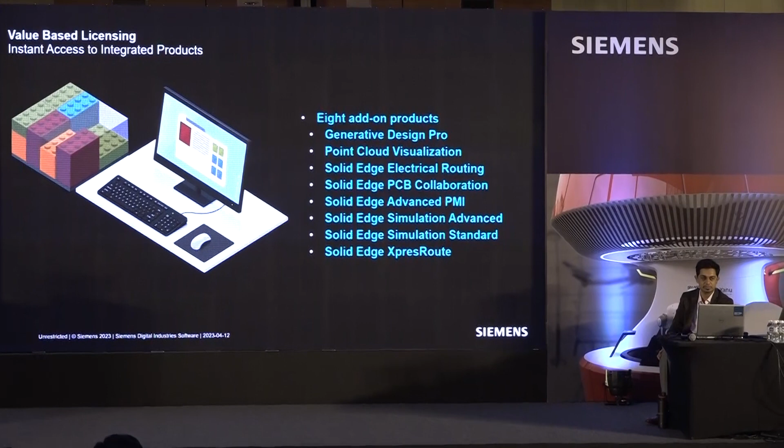Okay, so these are 8 add-on products that we offer with value-based licensing. I'm just going to pause for a couple of seconds. It is available as hybrid SaaS modules only, so we can take questions more on them later on. We have flexible licensing subscription packs of 25 and 50 tokens, basically offering more flexibility for you to add more products.

Okay, this brings me to the end of the presentation. Basically, traditionally we have been offering customers licensing options of perpetual only. Now we are also offering licensing options of Solid Edge SaaS, and my friend Nitin just took you through the advantage of that. We have a whole community running which writes blogs, and you can also as a customer share your own experiences on the forum and blogs, post your questions, and we also have a knowledge base.